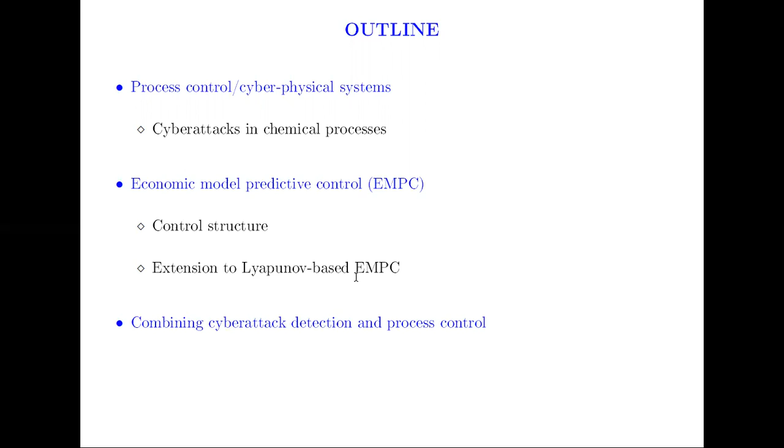A cyber physical system framework integrates control designs, physical processes, and computer and communication networks. Although it advances process operation and enhances the capability to control the process, it also makes these connected systems more vulnerable to cyber attacks, which can cause changes to cyber physical components, such as sensor measurements, signal actuators, or controller code, to directly affect the system dynamics. Because of this, cybersecurity is needed for maintaining the expected operation of critical industrial components.

Cyber attacks can seek to impact various concerns such as profit and safety, which may include, for example, alteration of data and product design, generally motivated by financial gain. However, engineering strategies can be explored, such as detection mechanisms and resilient controllers for cyber physical systems, which will be the focus of this talk.

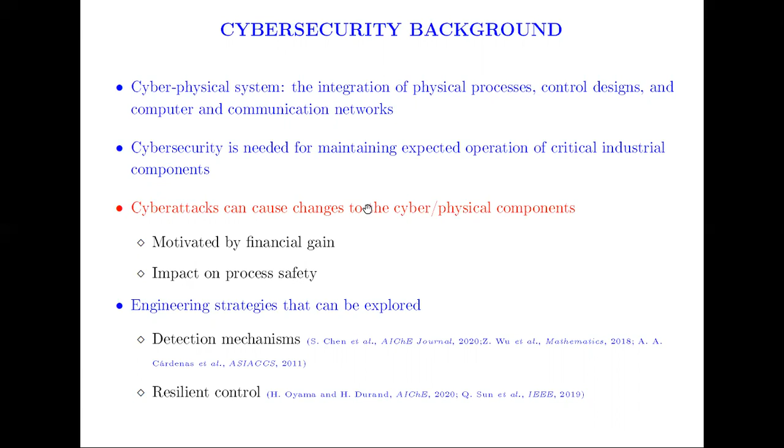Although significant progress has been reported in the literature, additional strategies are needed to enable nonlinear systems under advanced control laws to be made cyber attack resilient. Control theoretical advances are a step toward resilient control designs, since they may aid in attack detection methods.

In this work, we consider a type of controller called economic model predictive control with Lyapunov-based stability constraints, or LEMPC, and it has strong theoretical properties even in the presence of sensor noise and plant model mismatch.

Particularly, we explore two concepts for utilizing this control design to attempt to detect attacks. First, we develop an LEMPC with random control law modifications to probe for cyber attacks. Finally, we developed an output feedback LEMPC with an attack detection strategy based on redundant state estimators.

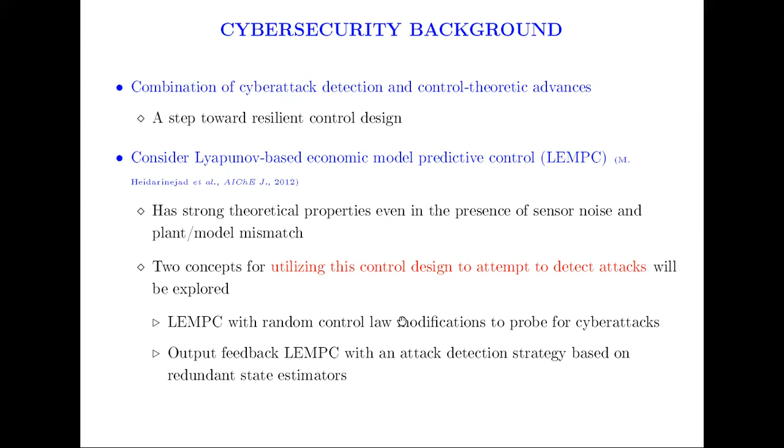We now provide some preliminaries for the presentation, starting with the class of systems we are looking at. We consider that state, input, and disturbance are all bounded. We also consider that the process is stabilizable, meaning there exists some control law, which we denote as h of x, that is able to drive the process state to the origin.

The way that we will evaluate this mathematically is via Lyapunov functions. A Lyapunov function can be thought of as being like the energy of the system, because it takes a zero value at a steady state and takes large values as you move away from this equilibrium point. This general terminology can be described by this figure here.

We have this open set D, where the time derivative of the Lyapunov function is negative, and we also have another region, omega rho. This is called the stability region, which is a set of initial conditions where if you start the process state within that region, under the controller h of x, the process state remains in omega rho. In fact, it will be driven to the origin, which is reflected by this blue trajectory here.

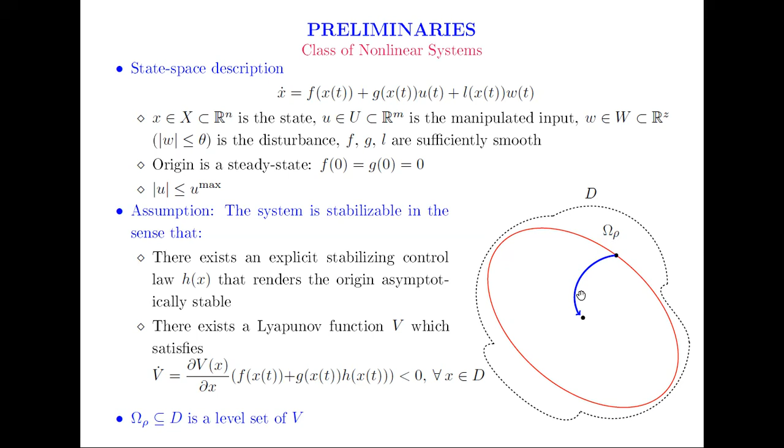We also assume that there are m sets of measurements continuously available, and a deterministic observer exists for each of the m sets of measurements. In addition, we assume that there exists a finite time T_bi such that the difference between the state estimate Zi and the actual state X is bounded by a maximum value.

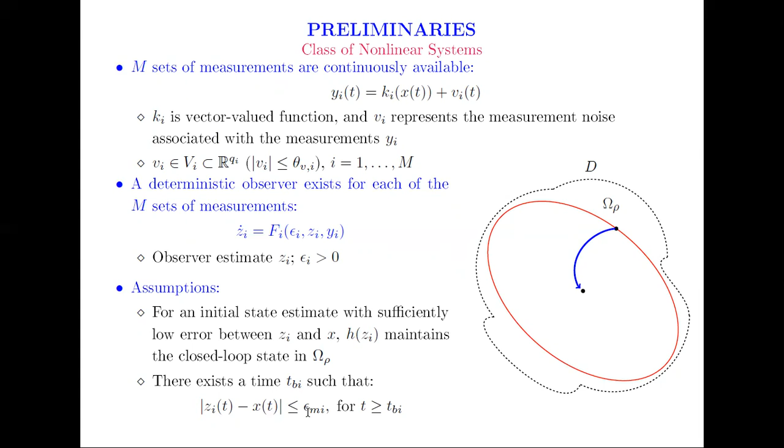For cyber-physical systems, cyberattacks can be understood in a dynamic system context. Consider this feedback control loop in which the controller uses the error between the process output measured by the sensor and the set point to compute the control actions to be taken by the actuator. This feedback control loop may be used to regulate the process against disturbance or to track a set point.

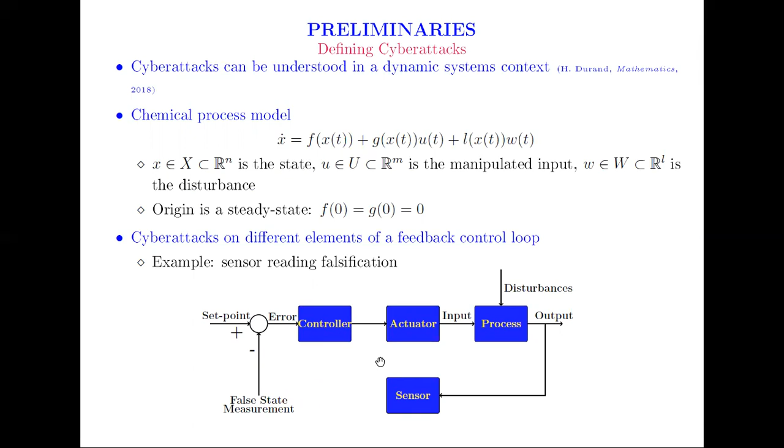That reflects certain process goals. A cyber attack, for example, may falsify state measurements provided to the controller. In this case, there is no more feedback response since the state measurement is false. So as an attempt to overcome this problem, state estimation may help with reconstructing falsified states and detecting attacks, and this will be demonstrated in one of our proposed techniques later.

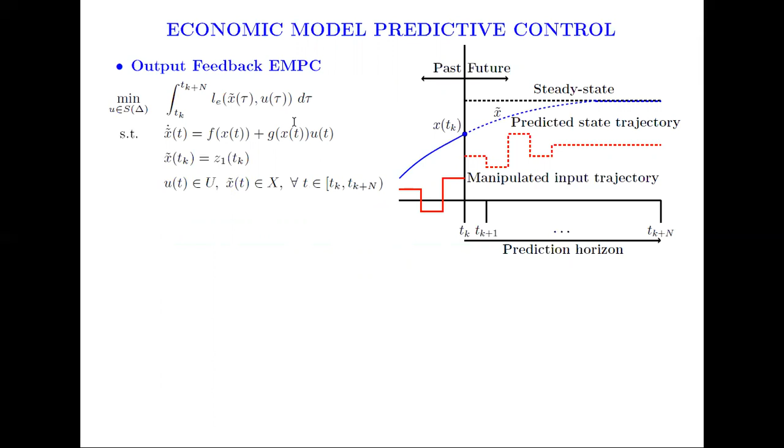Since full state measurement may not be available, we define this general formulation of an output feedback EMPC. The main characteristics of an output feedback EMPC are an internal model that allows the prediction of future behavior, the criterion for optimization, and we have a general objective function that does not require to take any specific form, and the concept of a receding or moving horizon. That is, the optimization problem is solved every delta time units, where delta here refers to the sampling period, and its sampling time tk. We also have input and state constraints, and state estimates are based on the available measurements.

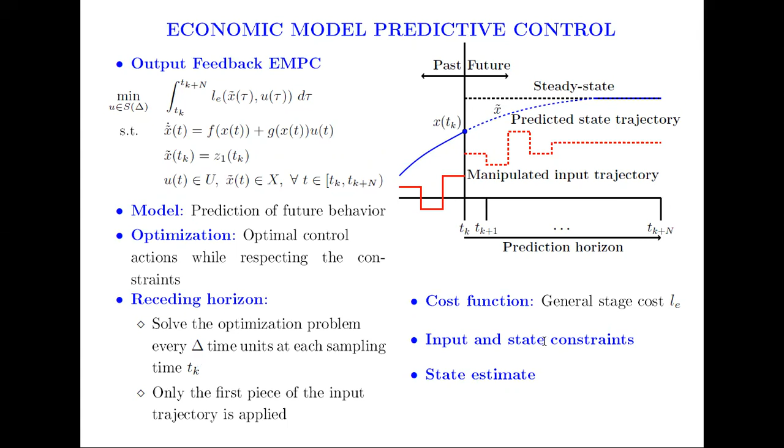However, that general terminology does not guarantee or address issues such as whether or not there exist control actions that cause all the constraints to be met. And also, it does not guarantee that you have closed loop stability. As a result, there are many variations on this control formulation to try to answer these questions, and the one that we'll be using in this work is the Lyapunov-based EMPC, or LEMPC.

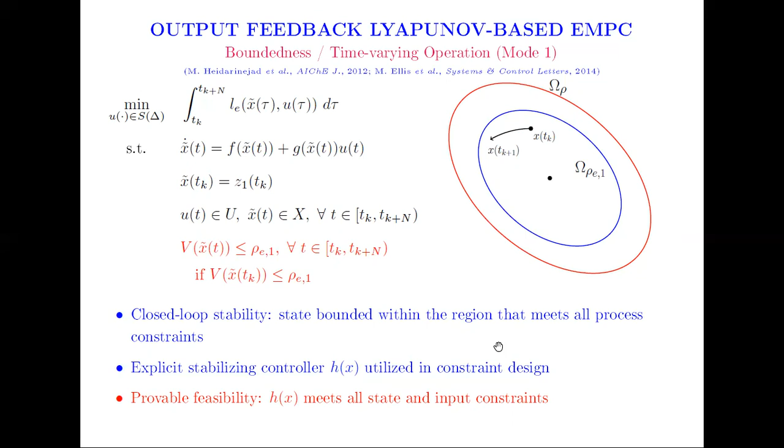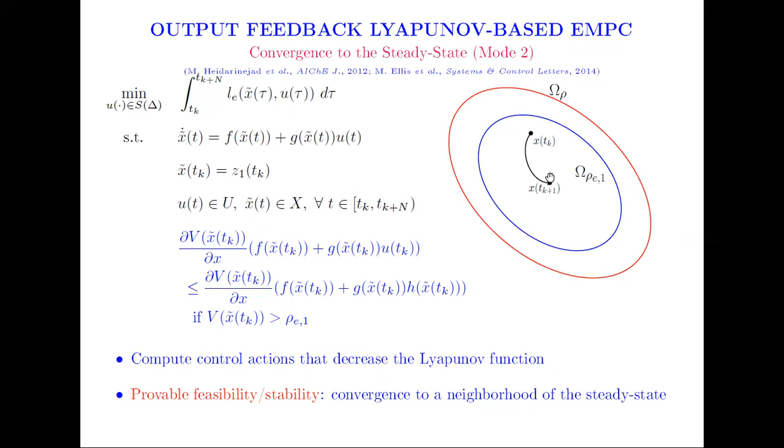This is a two-mode control design, where the first mode is associated with allowing the process state to vary over time and within the stability region. The second mode of operation is shown here, where we have this blue contractive constraint, and what this constraint does is force the process state to a neighborhood of the origin or steady state.

Now we consider several detection methods which utilize the stability properties of LEMPC to guarantee that several attacks can be detected under certain conditions. We provide two detection control concepts. The first detection method assumes full state measurement, that is Z1 equals the accurate state at tk. So for this first detection concept, we consider that Nv Lyapunov functions and Lyapunov-based controllers exist.

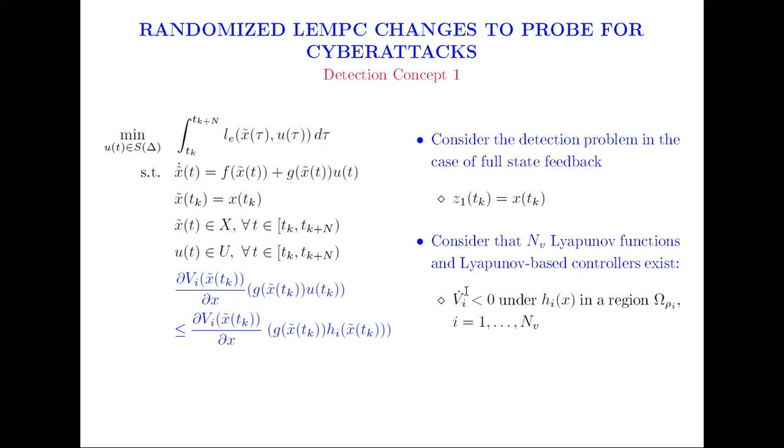Specifically, in the absence of an attack, if this contractive constraint is activated, the time derivative of the Lyapunov function along the closed loop state trajectory under the control of h of x is expected to be negative. This expected outcome suggests that attacks could be detected by seeing whether or not the Lyapunov function Vi decreases over a sampling period.

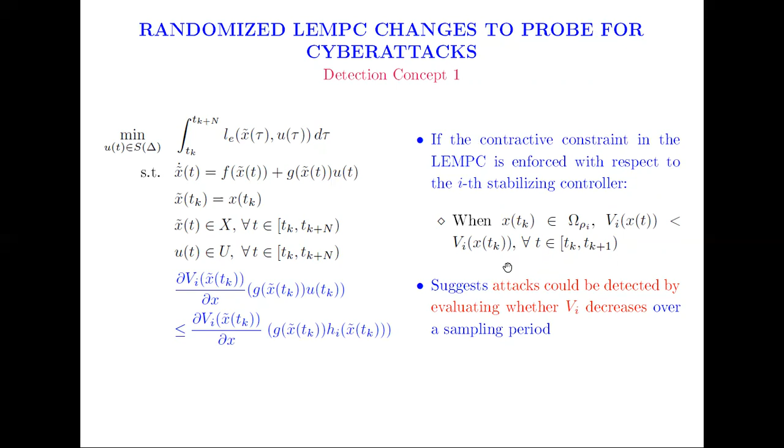So to implement this control strategy, LEMPC primarily operates the process in the baseline stability region omega rho 1. In this case, the LEMPC is designed using V1 and H1. To probe for cyber attacks, the LEMPC formulation changes at random probing times to one which uses Vi, Hi, and omega rho I, which is a subset of the baseline stability region.

If no attack occurs, the new Lyapunov function Vi should decrease over a sampling period. Otherwise, we flag it as a potential attack event. We highlight here that this control detection concept does not guarantee to locate cyber attacks, since Vi may also decrease even in the presence of an attack. What you can guarantee, though, is that if the Lyapunov function does not decrease, an abnormal behavior is detected.

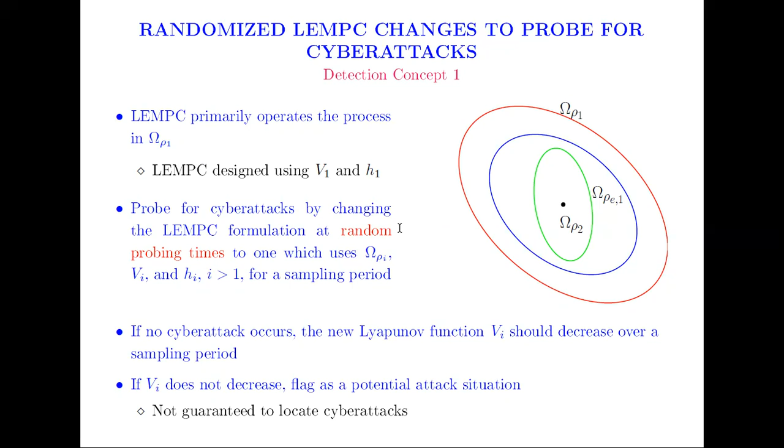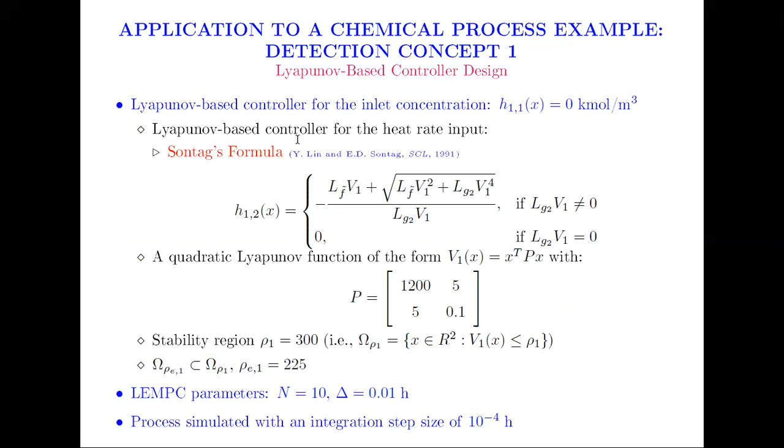The process model is in the input and affine form. These are the set of parameters for the LEMPC design, and we used Sontag's formula to design the Lyapunov-based controller on H of X.

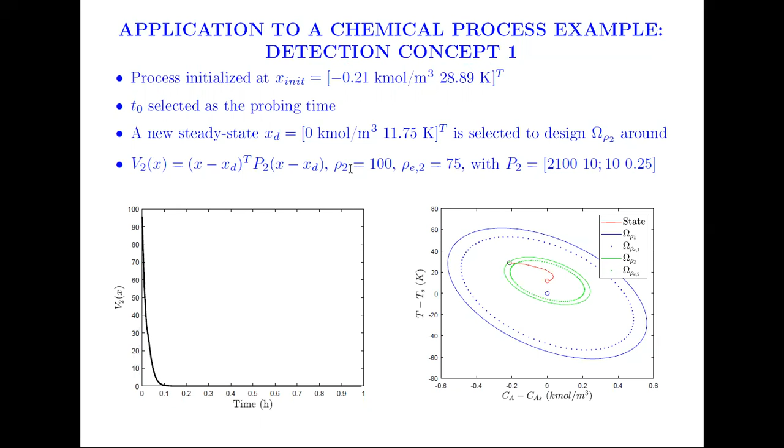In the absence of an attack, the closed-loop state can be driven to a neighborhood of this new steady state, which is reflected by this red trajectory here. In fact, V2 decreases over a sampling period following the switching time.

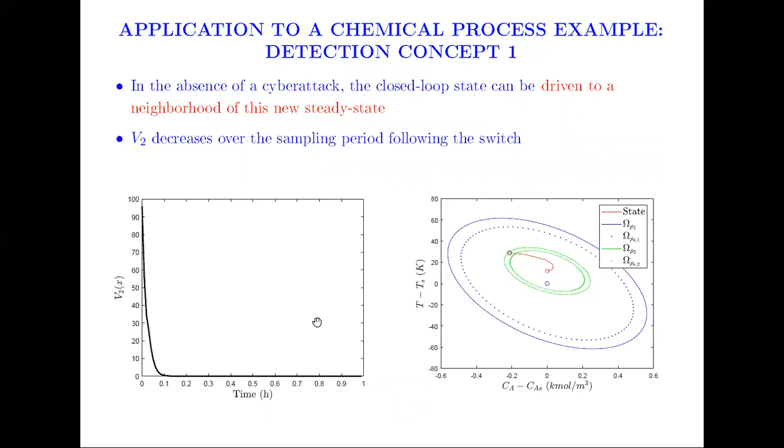Now we can describe a cyber-attack event which provides false state measurements on X1 and X2 at T0. The detection mechanism is again activated at T0. What you can see here is that V2 does not decrease over the next sampling period. In fact, it remains constant over time, and this is indicative of abnormal behavior. In this case, we are able to flag a cyber attack event.

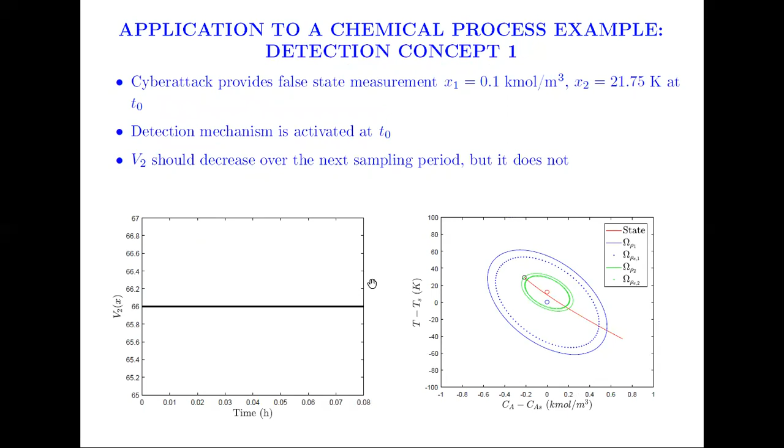The first detection concept begs the question: how can we guarantee that the closed-loop state is maintained in a bounded region of operation for all time?

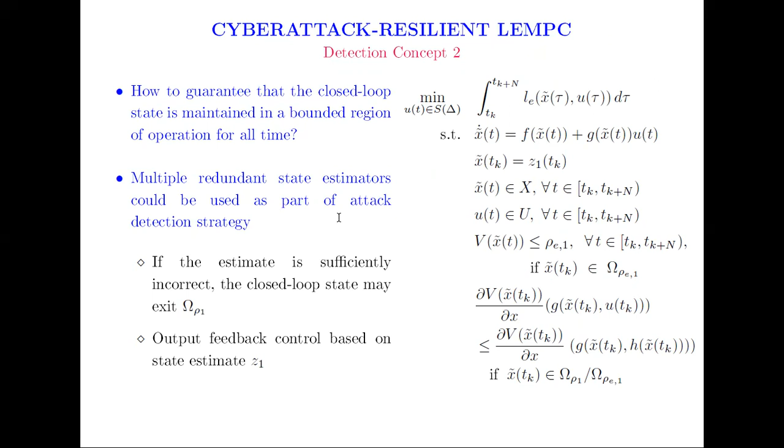A potential way to tackle this question is to develop multiple redundant state estimators as part of the detection strategy. Particularly, if the difference between the state estimate Zi and the actual state X is bounded by a maximum value, this also implies that the difference between two state estimates, Zi and Zj, is bounded by a maximum value, epsilon max, when no attack occurs.

So if an attack is detected, that is, if the difference between Zi and Zj is greater than Emax, we enter an emergency shutdown mode. An advantage of this detection concept is that even in the presence of an attack, if the difference between Zi and Zj is less than Emax, we can guarantee that the closed-loop state is maintained in the baseline stability region omega rho 1 over the subsequent sampling period.

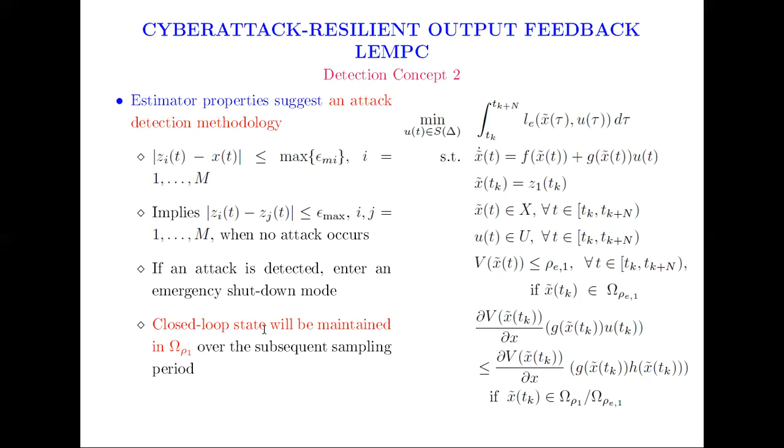We have the same chemical process example to illustrate detection concept 2. The only difference here is that we have only one manipulated input, which is the inlet concentration, Ca0.

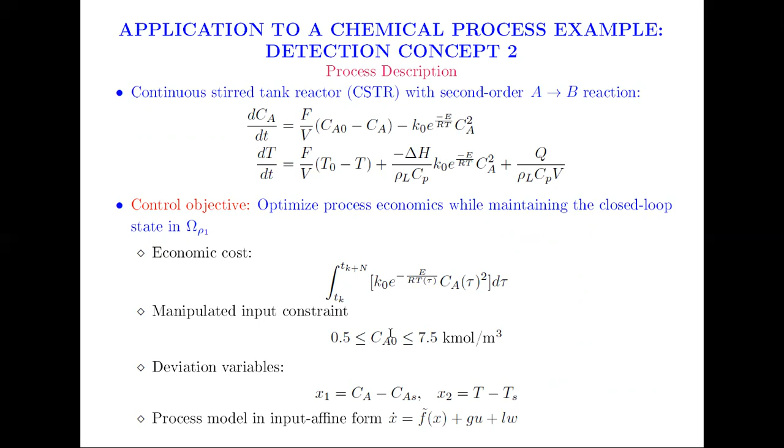This is the set of parameters to design the LEMPC, and in this case we used a proportional controller to design the Lyapunov-based controller on H of X. In addition, a high-gain observer is used as the redundant state estimator to estimate Ca from continuously available temperature measurements.

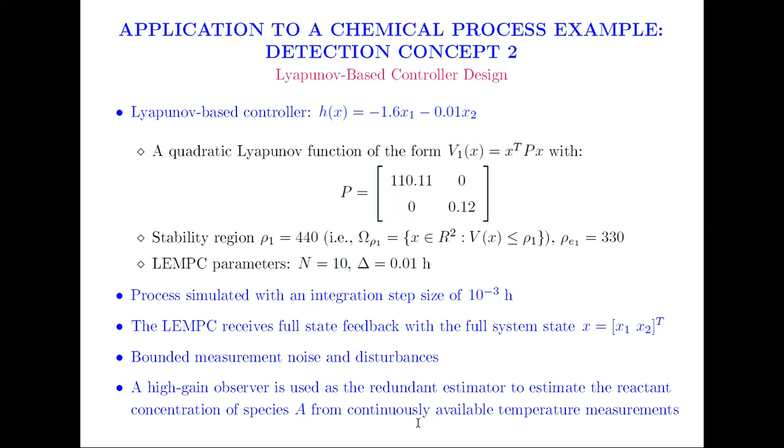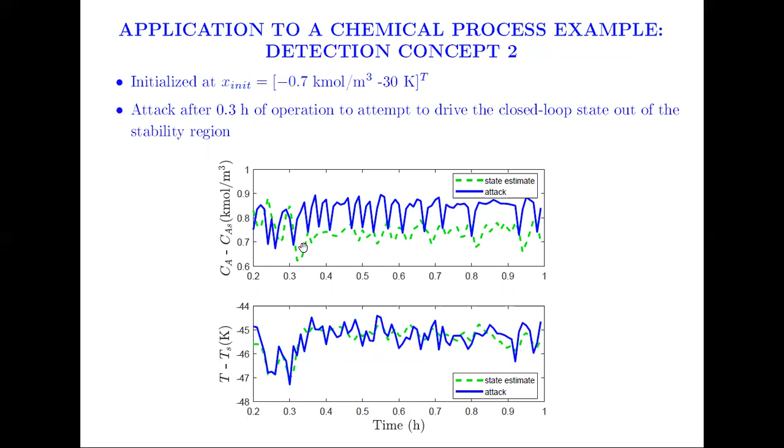In terms of conclusion, we developed detection and attack mechanisms using LMPC that take advantage of control theoretical guarantees in detecting attacks. We first developed a randomized LMPC scheme to probe for cyber attacks. We randomly modified the control law in such a way that we should see a specific outcome if no attack is occurring, by evaluating whether or not the Lyapunov function is decreasing over time.

However, there's no guarantee that these detection methods can actually detect an attack. Finally, we developed a cyber-attack resilient output feedback LMPC based on state estimation, detection, and control framework. In this case, we assume that multiple state estimators are available for the process.